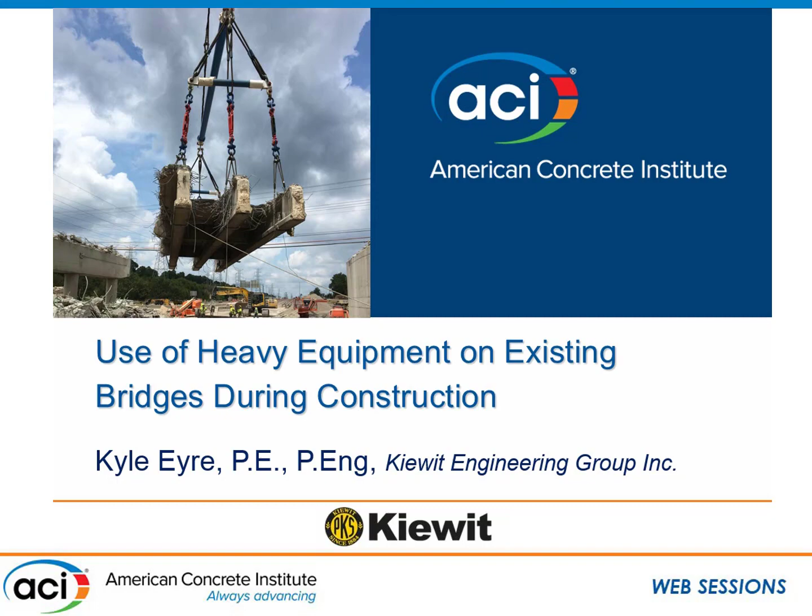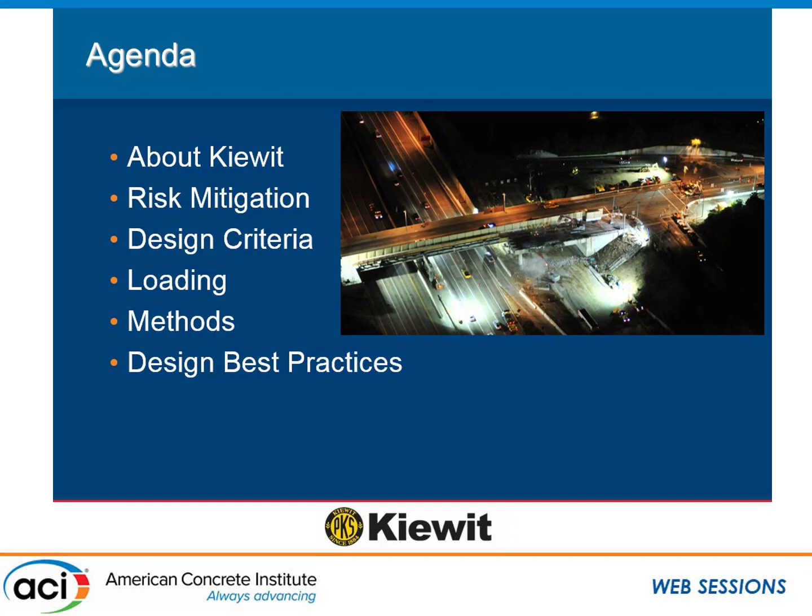So today the agenda I'm going to cover here is talk a little bit about Kiewit, our culture, our history, where that comes from, and that kind of sets some of the context of why we're doing what we're doing. Then I'll focus in on risk mitigation, what kind of efforts go into place in making sure you keep everybody safe. Talk a little bit about design criteria and what we've chosen to push forward with when we're looking at heavy equipment on bridges, superstructure during demolition or during construction. Focus a little bit on the loading, what you can expect to be controlling. Then I'll mention some of the methods that we choose for the best practices for specifically demolition. I'll touch a little bit on erection as well. And then finally, just some more design best practices, what we would recommend pushing forward with.

So a little bit about Kiewit. We were founded in 1884, 4 brothers. Today we've got around 30,000 employees. That includes all of our full-time staff and craft. Full-time staff, we're at about 11,500 or so. We have about 1,300 engineers across the company, which is something that not a lot of people know.

We actually have efforts in place to grow to 2,000 engineers here within 2 years. So it's just kind of a staggering thing to think about. We want to have the right kind of growth.

And we do a lot of challenging designs and design reviews, and really we see some of the highest loading on the bridge superstructure during construction, during demolition, that it would see in the service life.

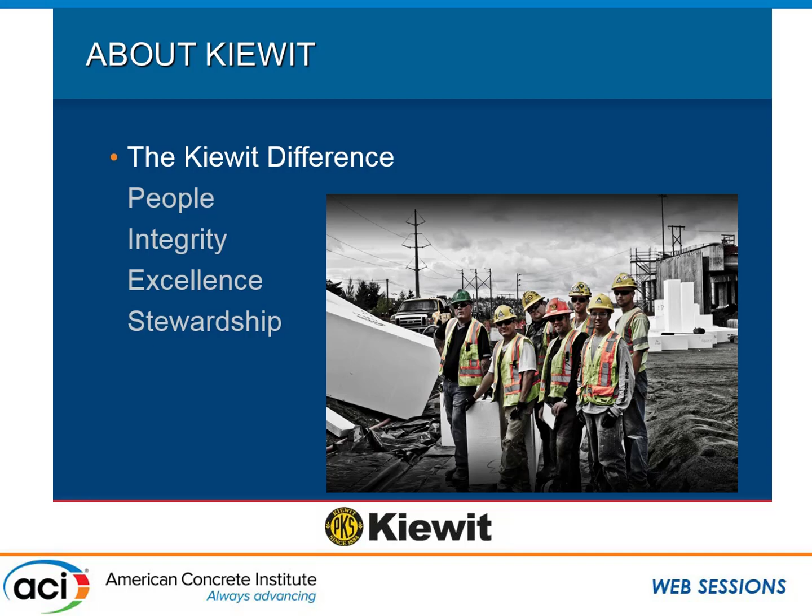So then along with that, and kind of tying in well with Joe Eyre's session here this morning on risk, that's something we take quite seriously, in that we do have a corporate policy at Kiewit that there is risk. We understand that we have risk. We build this work. We know that at times we can see the highest risk during construction, during construction of an operation.

And to respond to that, we created a policy that basically says, okay, we have risk, we need to mitigate this risk, we need to take the proper action and measures to reduce that risk. So one of the responses to that is that corporate policy, but we've developed a manual that helps us to address and mitigate the risk.

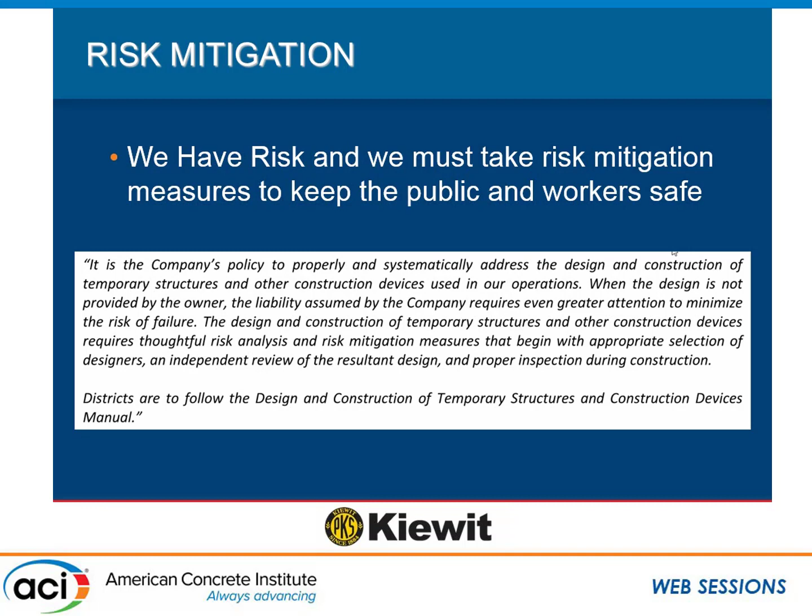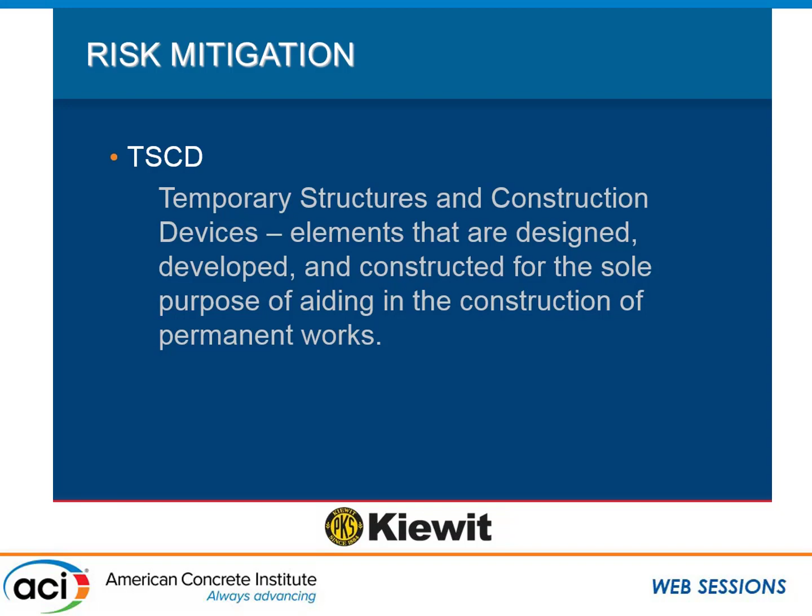Just a little bit of background to some of the consulting structural engineers: we do have temporary structures and construction devices. Many of these are created in order to aid the construction to get to that final condition where it's a final structure. But in that process, there are all these permanent works, and all these temporary works that go in support of the permanent works. So many different types of structures that you can imagine: formwork, false work, support of excavation, cofferdams, staged construction, staged deconstruction. This is all something we identified that we need to cover. We need to help mitigate risk.

The basic philosophy is that we conceptualize, design, review, inspect, and verify. This document is something I've seen put together around 20 years ago. It's been well defined and implemented throughout the company. It's a requirement for every project to follow this, and it's actually revised sometimes annually, sometimes twice a year.

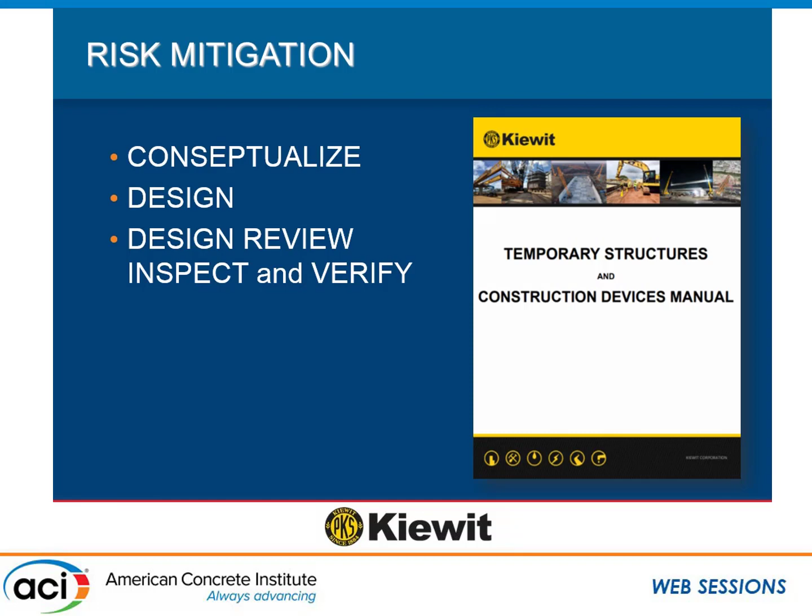It spells out that philosophy of identifying the temporary structures, the temporary works on the project, analyzing and categorizing the risk. So ask yourself two basic questions: during this bridge demolition, what's the worst that can happen? And then, what is the likelihood of that? You can play off those to see the different impacts on safety, worker safety, exposure to the public, your reputation, and impact to cost and schedule.

Based on that, we can categorize the risk of certain operations and certain temporary structures, and as a response, we mitigate the risk by selecting the appropriate designers. We wouldn't have a six-month intern designing a high-risk tower crane foundation in downtown Seattle. So we take the right measures there.

We reach out and collaborate with subcontractors and consultants that specialize in some of the work we do. Then we document and verify, so we have a very robust inspection and re-inspection program to make sure the structure is being built accordingly.

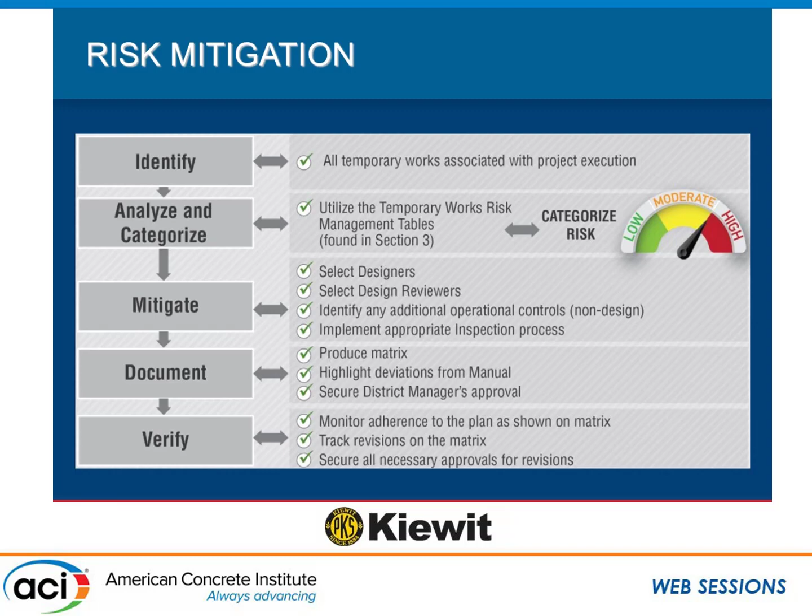For a good example, on heavy equipment on bridge superstructures, we have a table in our manual covering permanent structures and the temporary condition during construction and erection. You can see there are different categories: low, moderate, or high risk. In response to those, we implement different levels of requirements for who is qualified to be the designer, the design review, the independent design review if necessary, and then the inspection.

Along with this, we ask ourselves those two questions: what's the worst that can happen, and what is the likelihood? That helps us categorize the risk that we agree upon with the project team building the work, in order to identify who are the right players.

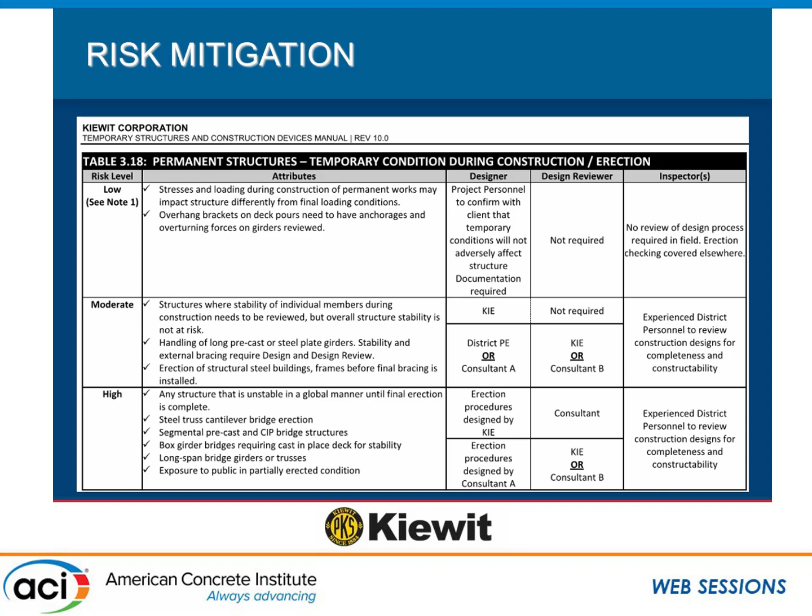Now shifting gears a little bit to talk about design criteria. When we look at loading heavy equipment on bridge superstructures, as Joe mentioned earlier this morning, there's really not a lot of guidance out there. You can go to OSHA, you can go to IBC, but there's limited guidance.

What we found is that our go-tos are ASCE 37-14, design loads on structures during construction. There's very good guidance in there, and we'll also follow ACI 318. We'll look at AASHTO's LRFD bridge construction spec for the load factors, and there's also the guide design specification for bridge temporary works in AASHTO. We'll reach out to other resources if needed, such as AREMA if dealing with rail, or internal documents I co-authored, like the construction engineering design criteria.

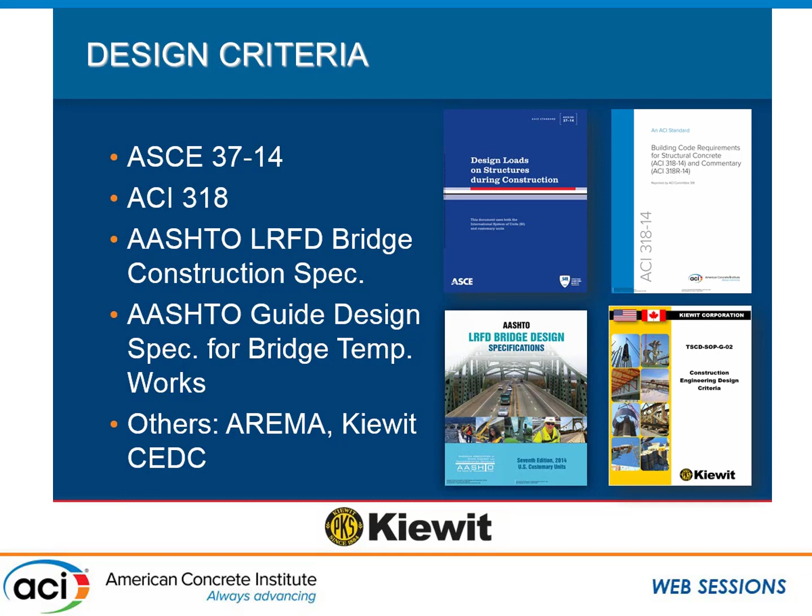Similar to that manual we've got for temporary structures and construction devices, this is more readily used on project sites to categorize the risk and then mitigate it. In-house within the Kiewit engineering group, we've got this document to give us a good starting point for putting together the numbers for some of these structures.

Talking a little bit about dead loads: a lot of these operations have a controlled environment and very limited time, so we need to make sure everything goes according to plan. One of the things we look at is accounting for all the different dead loads we can identify—lots of pre-inspection, conversation, and site visits with the project to identify everything that's there: self-weight measurements if we don't have good past drawings to go off of, the wearing surface, barriers, and any utilities that need to remain in place, say adjacent to the new structure.

We do recommend AASHTO 3.4.2.1—there's a design load factor of 1.25 looking at the max force effect during construction. We'll actually be conservative and go with 1.5 for dead-load-only cases where the excavator is not on the superstructure.

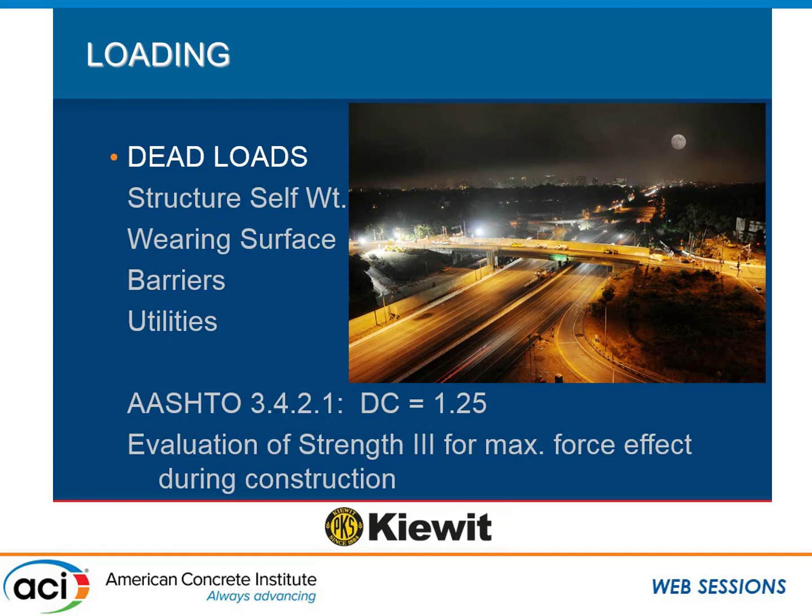Moving on to live loads: many times it's the equipment self-weight that we need to capture, along with the dynamic impact effect of these hydraulic hammers that impart vibrations to the structure.

So AASHTO 3421 as well, live load of 1.5, impact factor of 1.33. We'll follow this fairly strict guidance here because we do want to know that true safety factor. We don't want to be pushing the limit and having a structure that becomes unstable, because what we're doing is selectively reducing that stability of the structure in a very precise manner so that we know how much we can take away before we are at risk of collapse. But we want to take away enough that we can move that material to the proper equipment to basically safely take the thing down.

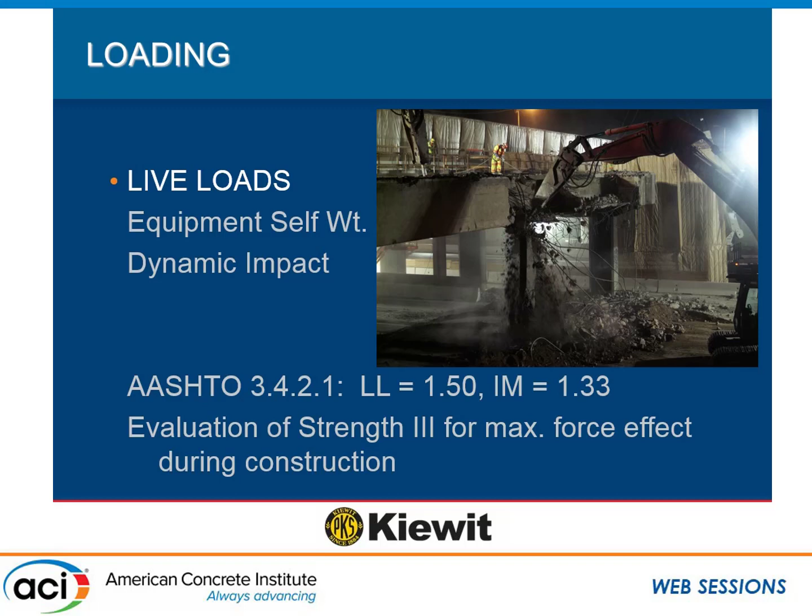So a little bit more with equipment here. Many times the excavator on the superstructure will govern, it'll be the governing load case. The typical excavator is going to weigh anywhere from 30 kips to almost 250 kips. It really can go that high, and as a contractor, I'll tell you, we will try to put the heaviest excavator on that superstructure that we possibly can. The reason being is that it's going to have more power, it will be able to take out more material more quickly, and so in our mind, if we can design for that weight and understand what our true factor of safety is, then we can minimize the operation time

and cycle for taking that bridge down. If we were to use a lot of equipment that's 5,000 pounds or less, sure, we could do it with minimal impact to the structure, but then it would take forever. You'd have a lot more exposure to the workers, to their safety, to the public and their safety, especially if they're underneath one of these bridges. And many times, the economics just don't work out where we do have a weekend closure, so we can't have the luxury of time there.

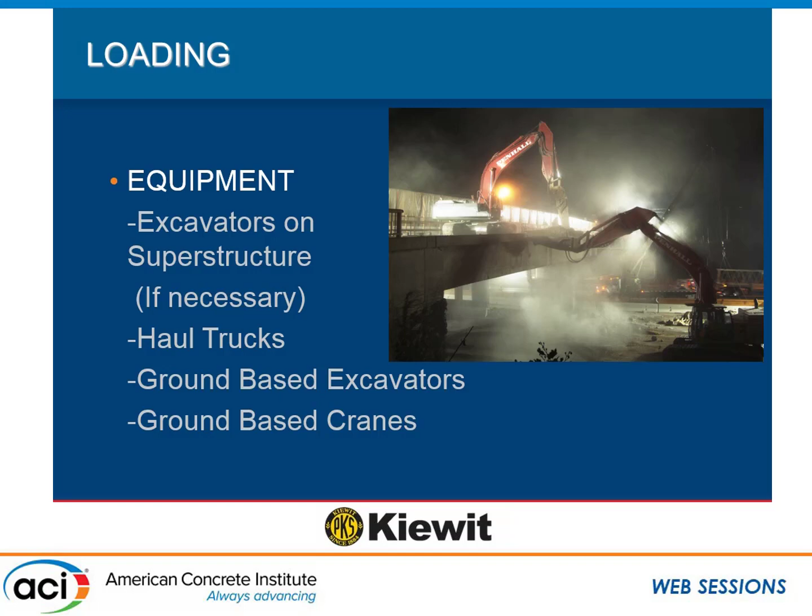A lot of the operations are well planned if you can eliminate heavy equipment on the superstructure and utilize ground-based excavators with large booms, and you can reach up high, as well as a ground-based crane to lift out sections of the deck itself.

A little bit more on equipment. I mentioned here the 40 to 100 kip range. That's our optimal range, what we've seen that most superstructures, typical construction can take. We do have the option of heavier excavators, but then there are more challenges design-wise. So the optimal range we found is between a 40 and 100 kip excavator. And we compare that back to, say, remember the AASHTO design truck at 72 kips with the two axles in the back and the one in front. So you can kind of see that we're putting higher loads on the superstructure than it was intended for.

And so what we do is we look at, okay, what's going to be our worst loading case? Many times it actually is the crowding effect, or it's called the dynamic position for the excavator, where the boom is pushing down with its nose, pushing down with that hydraulic hammer, and then it's kind of going back on its heels if its tracks are forward. So you think about all that nice uniform distributed load on the tracks, you push down a little too much and you go back on your heels. That can kind of spike to concentrated loads that are higher than the allowable capacity of the deck would be. That also, if your tracks are turned 90 degrees and you're leaning over the side too, you can have a shorter distance between those concentrated load points. So that's something that we will always look at, rather than just a specific total dead load and a uniform distribution across the whole tracks.

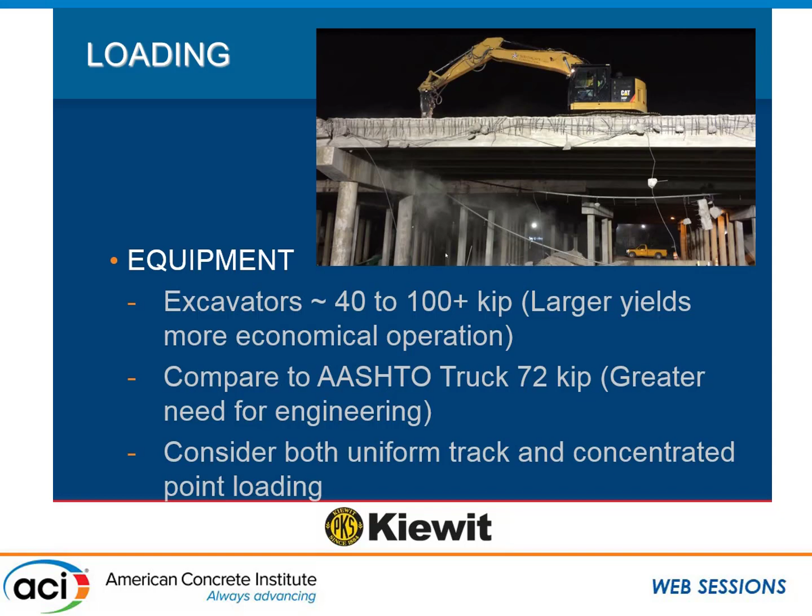There's many different methods for deck removal. Some of it is, you do some initial core holes to start and do a deck slotting operation. This obviously reduces the girder's stability, so we don't want to take away too much, we want to take away just enough. And one of the things we do recommend is to have the diaphragms remain in place as long as possible, until the very end, when you do go to take down that final girder, that single girder. Diamond blade saws, those are expensive. They're generally recommended for a limited application of cut lengths.

What we do prefer and what we've seen in the past is a diamond wire saw is the most efficient. You can cut large swaths in a short amount of time. You can get a clean cut. There's a minimized, reduced amount of vibration to the structure that occurs.

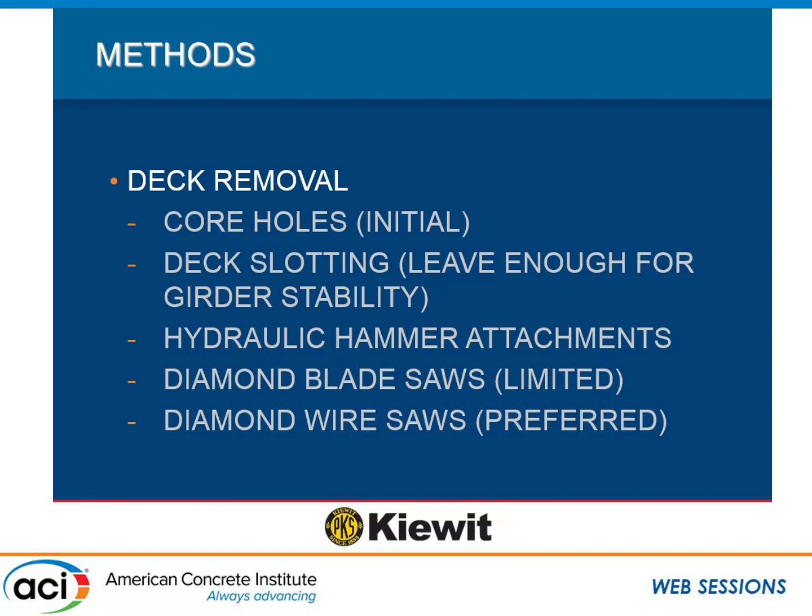So that's something we will start with as an option of, let's do a slotting operation and then move on to a more mass removal, and I'll show some examples of that here.

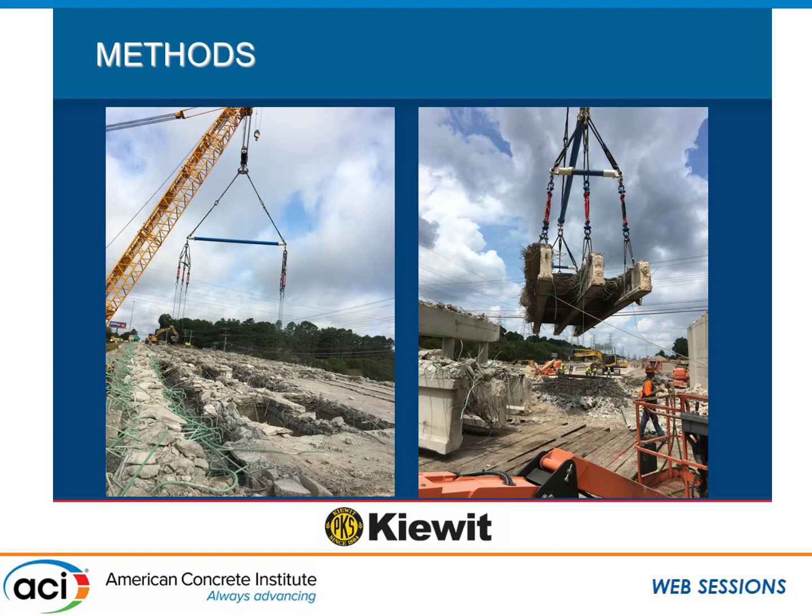Once you're finished with the operation, everything is pretty mangled, and we'll look at crane capacity and ground-based cranes and radius to make sure we can lift the segments that are in there. So it's not a simple linear approximation of the total weight. You've got to account for the pieces that are mangled in there.

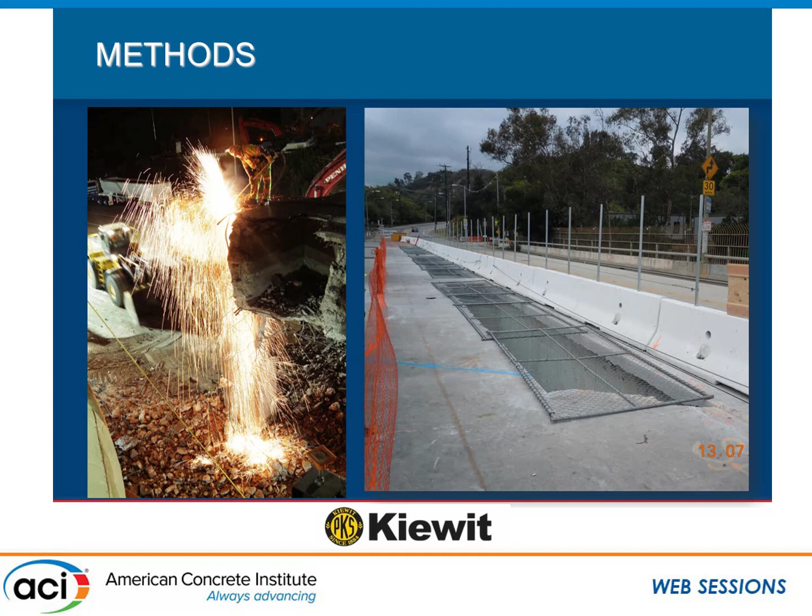Obviously, a lot of this work is occurring at nighttime. There's limited visibility, and part of that superstructure is all still attached with all the reinforcing. So you get torches and flames that cut through the rebar. This picture on the right shows the deck slotting operation and what is still remaining after the cuts occur.

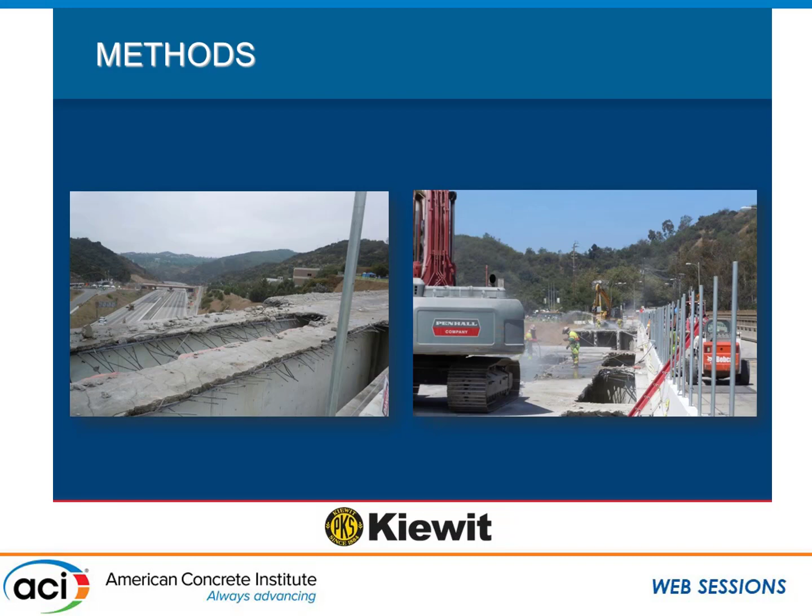A big part of that planning and the risk mitigation is the staged sequencing. So we want to make sure to evaluate every step along the way and understand that you've got a reduced wind capacity, reduced wind exposure.

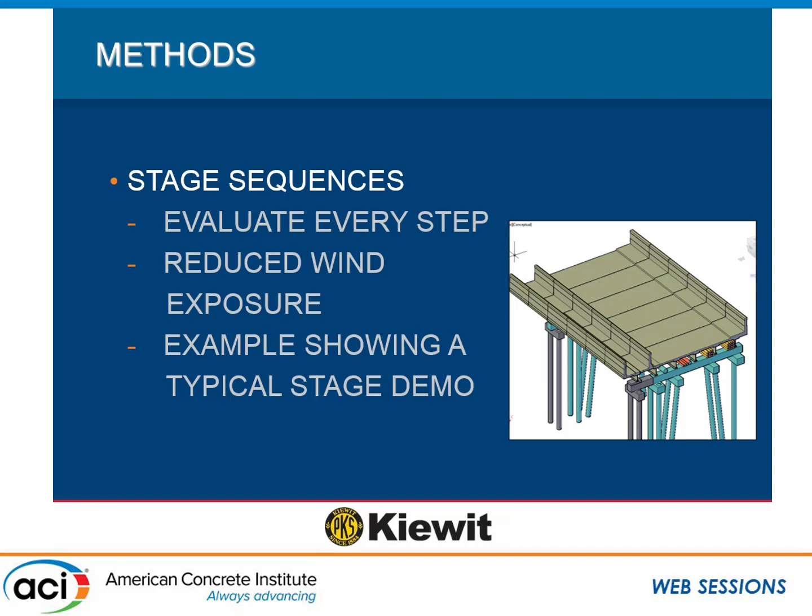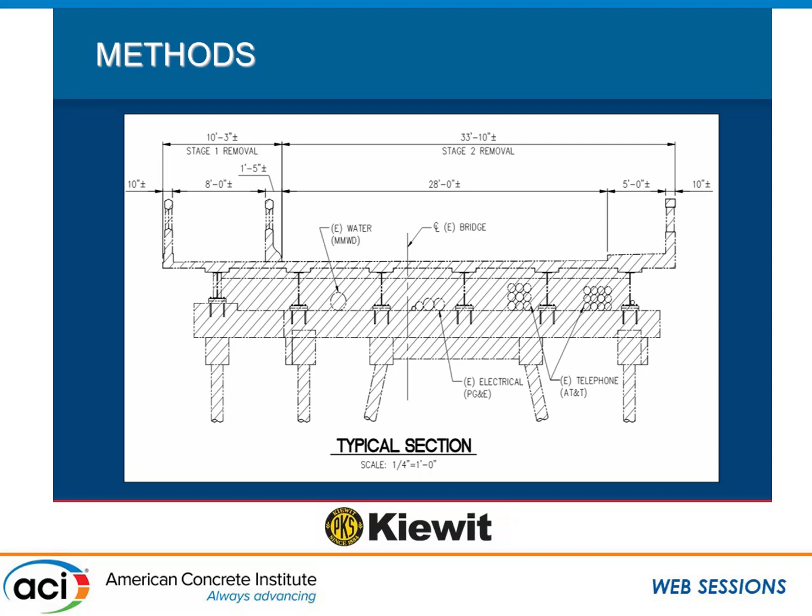There's an example here that shows a typical phased demolition process. Typical cross-section here, you've got a bike path on the left-hand side, and then your lanes of traffic on the right. This kind of schematic planning effort goes in hand well before the operation, so that everybody, all the team members, understand what is involved and what we're going to be looking at.

Step one, we'll remove that outer barrier rail, saw cut in 10-foot pieces, pick with the excavator and set it onto a haul truck. Sometimes these haul trucks can be 150 kips, so you're thinking a 70 plus kip AASHTO truck versus 150 haul truck. So sometimes we'll have to get creative in reducing the loading to the deck to make sure we don't have cracking issues if it's going to remain in place after, if this is a widening operation. If it's going to be remaining in place, we'll look at staying under the cracking stresses.

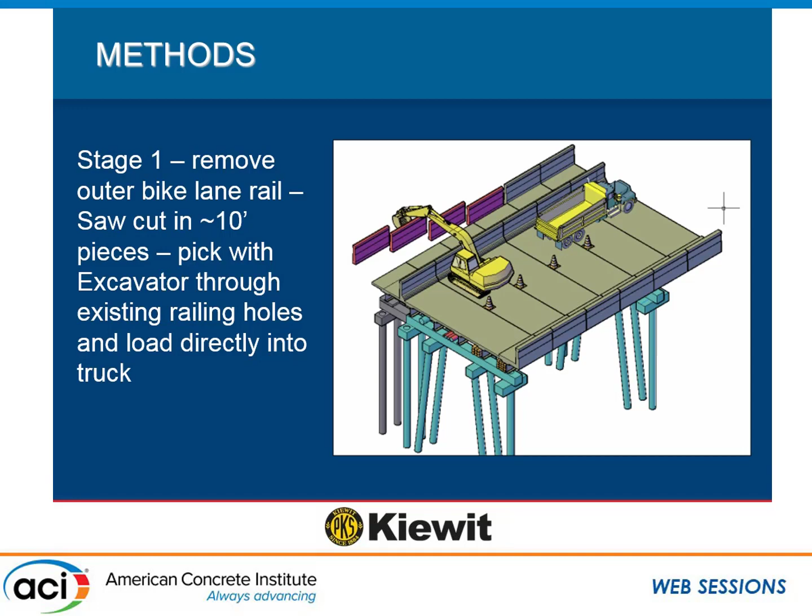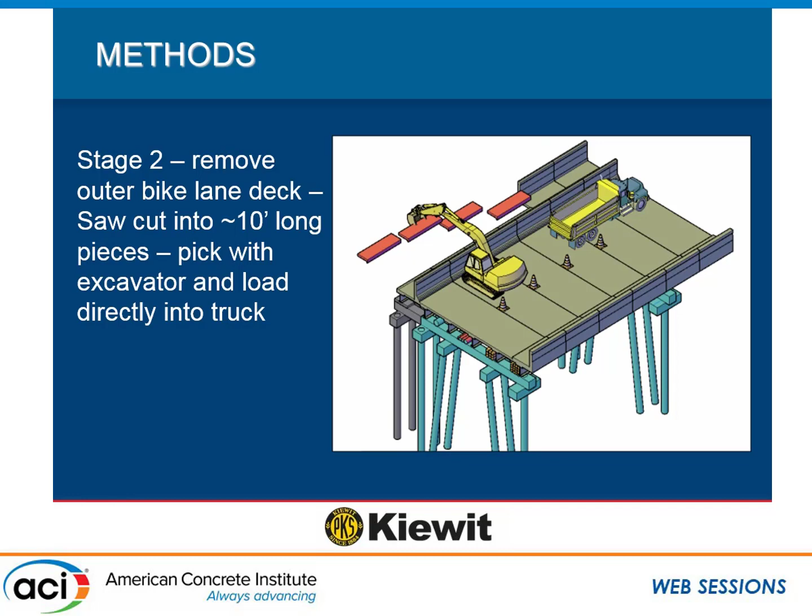Stage two, removing the outer bike lane deck, saw cutting into 10-foot pieces, picking with the excavator. This is a fairly efficient operation. And then next step, removing the inner barrier rail, the hoe ram excavator for demolition.

So this is all occurring, work overhead. This isometric view shows a little bit better of what ends up remaining. So removing the inner bike lane deck, saw cutting into 10-foot pieces, picking the slab with the grab and loading directly into the truck. We'll look at that loaded truck, and sometimes that could govern our deck analysis, our deck capacity.

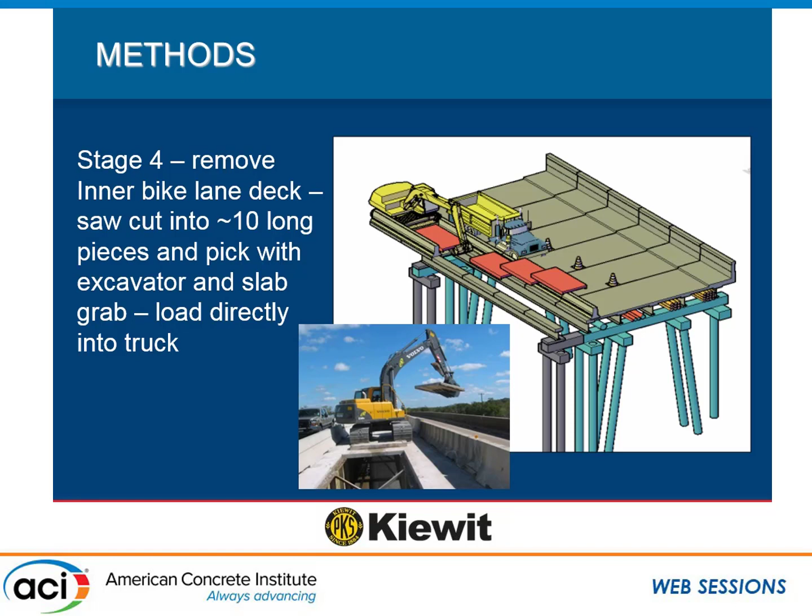And we can throw a crane mat on the deck to spread loads out. We can come up with a mini grillage if we need to reduce loads and bypass the deck. But that is definitely like a last resort there because of the time that it takes to set that up with these limited closure windows.

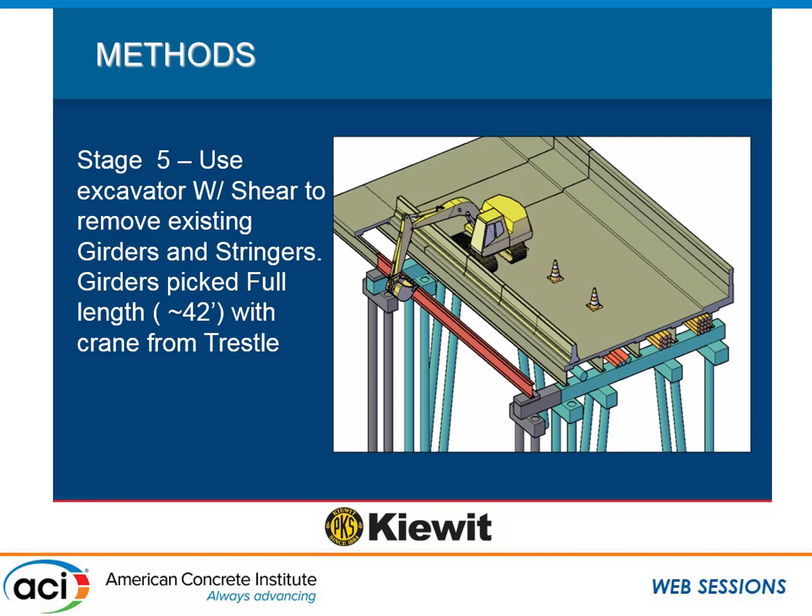Stage 5, using the excavator with the shear to remove the existing girders and stringers. Girders are picked full length with the crane from the trestle. This was an operation where it was over some water here. Final step, stage 6, wire saw the existing bent and top of concrete piles, picked with the crane from the trestle.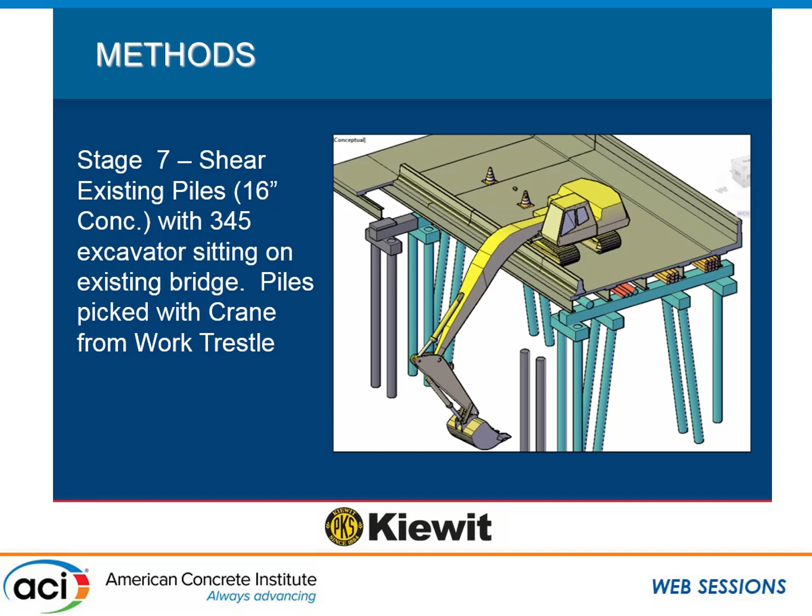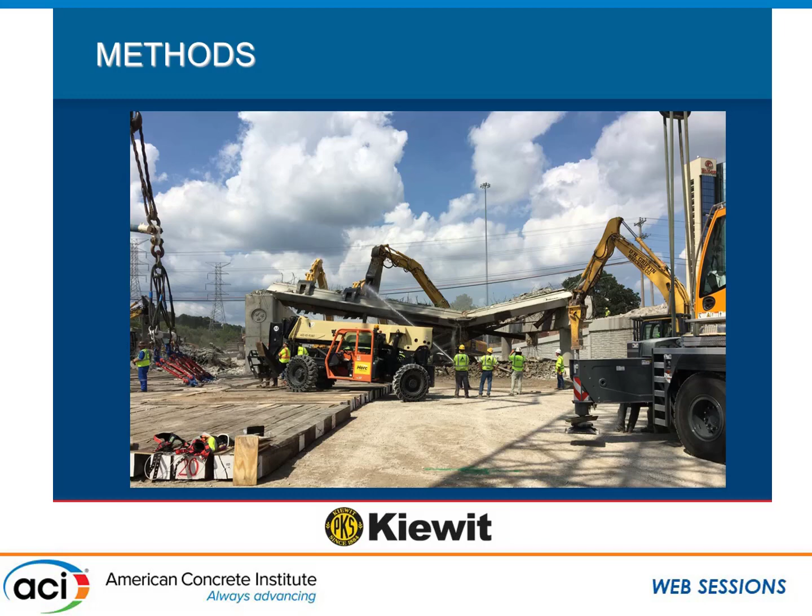Many times we'll have a blanket of soil down underneath the superstructure to soften the area so that falling debris doesn't impact the road pavement. We'll also have water spraying so the finished product ends up looking like this.

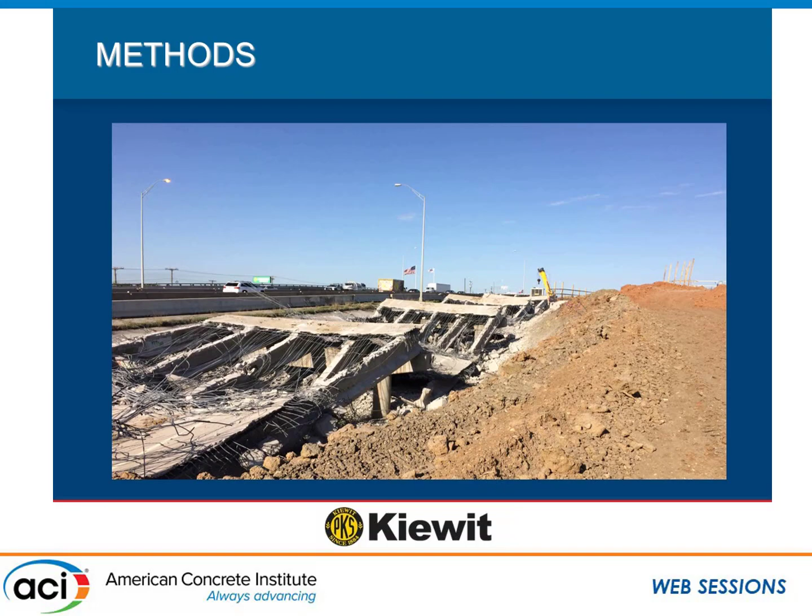This was obviously not over an existing roadway. That is a more challenging effort, because all of that material has to be cleared out by a certain time Monday morning, or you get hourly liquidated damages that are in the hundreds of thousands of dollars.

Some design best practices: obviously come in and add supplemental support when necessary. One of the stages here is to reshore and resupport that bent.

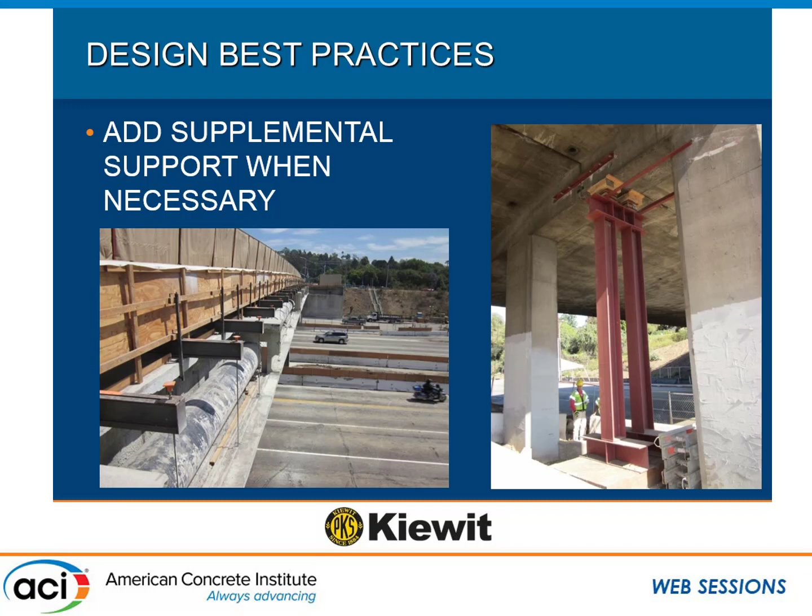You can see this false work underneath. Based on the stage deconstruction here, we wanted to place the support where it needed to be. In the photo on the left, we've got a utility that needed to remain in place and be supported, so we had a temporary false work system for that.

When evaluating each stage, you want to do it efficiently, starting with hand calculations. Don't jump right into a black box. We've always shied away from that, we want to understand first what we're really dealing with, then jump into something like RISA 3D or Midas Civil.

Midas Civil has the capabilities of supporting the staged construction or deconstruction sequences, locking in those time-dependent stresses. It's pretty valuable.

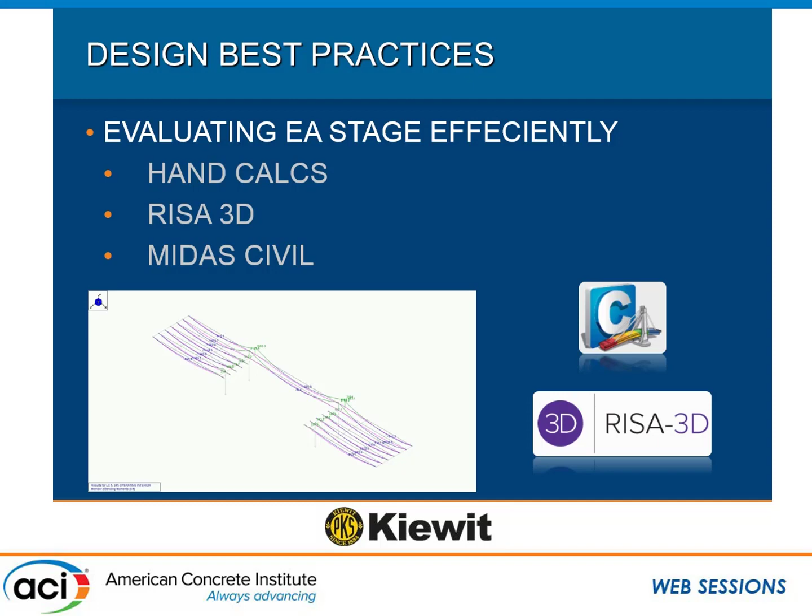But for a lot of the run-of-the-mill, say a TxDOT bridge superstructure demolition, we can utilize RISA 3D very efficiently, understand what our capacity is, what our demand is, and just push through that.

Obviously, consider your risks. You've got high-risk safety, with workers exposed up there on the superstructure. You've got high-risk cost if something goes wrong, if a structure comes down adjacent to a new structure and causes damage to it.

If your road doesn't open up in the time window, there are huge liquidated damages that can occur. Also consider adjacent structures.

We do like to, as Joe mentioned, plan the work and work the plan. We'll definitely reach out to consultants who are specialized in that, like Joe there with Sigma.

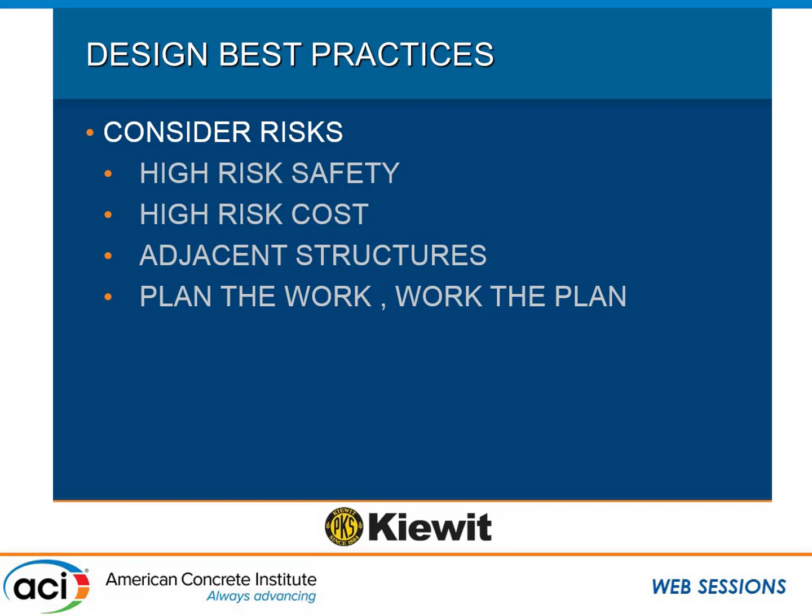More design tips: use conservative load factors. We don't recommend any deviation from, say, the highest limits that we've seen. There's particular language in ASCE 37-14 that allows a temporary reduction to the load factor based on an arbitrary point in time.

That's knowing how long your operation is and the known loads of your equipment. We never really deviate from that and go too low.

Serviceability is huge, especially if you've got a newly constructed superstructure and you're looking to put heavy equipment on it to move materials. We want to make sure we look at the serviceability limit states and understand that we're not putting stresses on the structure that cause cracking.

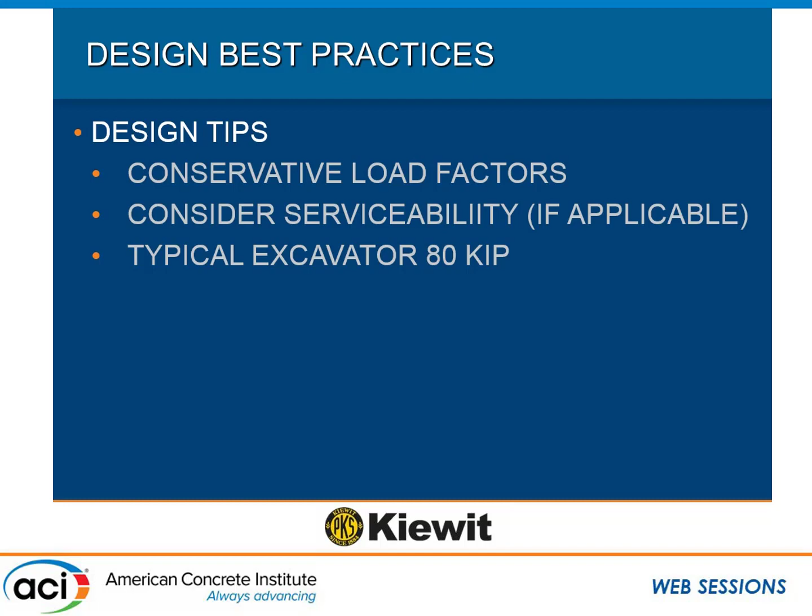That's a big one, and what we found to mitigate that is to use smaller equipment, more cycles, or use crane mats to bypass the deck with a mini grillage. Typical excavators we keep at around 80 kips, not too high, depending on the capacity though.

Final design tips: use crane mats if necessary to protect the deck, that's the weak spot of the superstructure. Usually you can minimize that impact with some crane mats to soften and spread out the load.

Load distribution frames if necessary. Sometimes we've put crawler cranes on bridge superstructures, and those have heavy track pressures, so we'll utilize a heavy grillage frame to bypass the deck and go right to the girders, if the girders have the capacity.

And then providing temporary false work, shoring if necessary. Obviously, have a plan and make sure you've got qualified people working on it. We do reach out to a number of consultants who also share in our efforts.